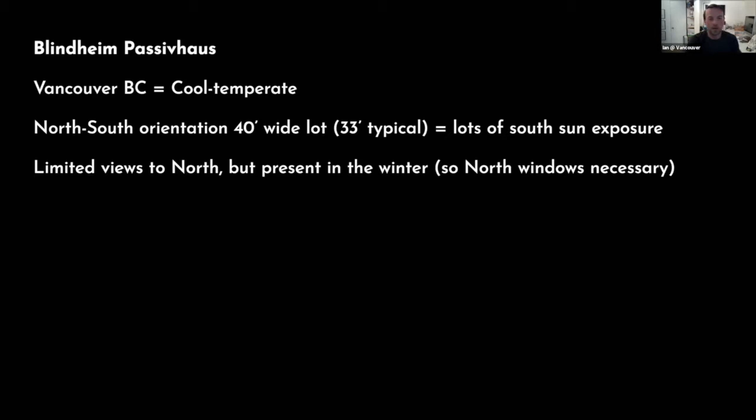The client didn't specifically want a passive house per se, but they did want all the superlatives that a passive house does. So when I added all of these things together, each one has a little bit of an additional cost over what a bog standard thing might be, so why not actually just put them together and do it properly. And then the fact that at that time there was a bit of a bonus for doing a passive house in terms of permitting, that certainly didn't hurt either. This has come down in Vancouver, it's become a little bit more normal, but for a while it was nuts to get a permit in Vancouver. So that was a big motivation.

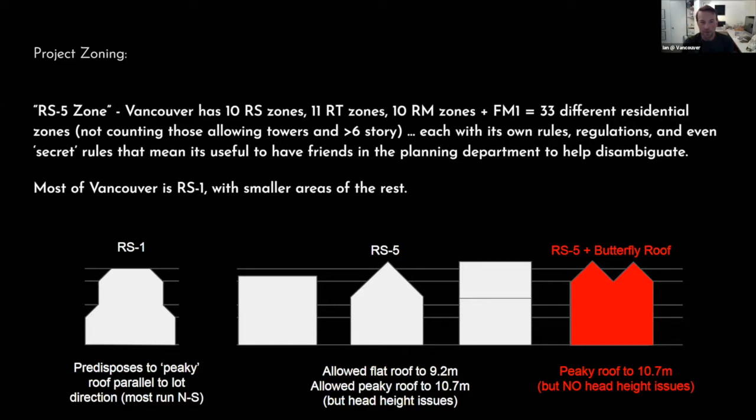The project zoning is in an RS5 zone, which is one of 33 different residential zones in Vancouver. It's impossible to remember them all, so I try not to. But basically, most of them are RS1, you get a peaky roof with some weird steps on the side. RS5, at least you get a big boxy thing if you want it. But if you want to go as high as you could, you have to do a peaky roof of some kind. Peaky roof, though, means less head height on the edges, unless you do a butterfly roof, and then you get the best of all worlds, and that's exactly what I did.

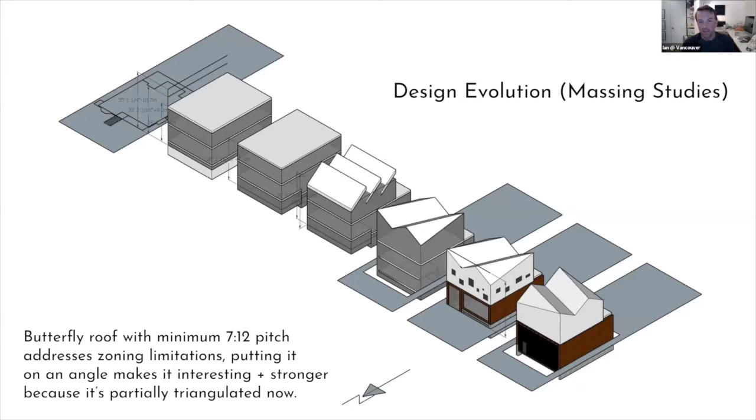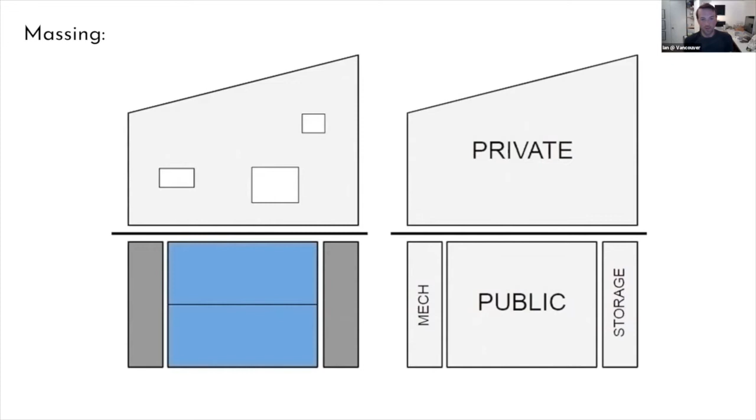Instead of doing just a standard butterfly roof, you can crank it a little bit and make it a bit more interesting. This is the initial design studies, and essentially it hasn't changed at all since the sketch on the bottom right. It just has to have a minimum of 7:12 pitch. Doesn't say that you can't have more than one of them, so toss two of them together and you've got a great roof. The massing diagram is basically a block on top of two chunks with a glass in the middle. Pretty dumb, but in this case dumb is good, simple is good, and that's what Passive House relies on a lot.

So you enter into the basement, because I wanted to have the entire house as much as possible above grade, and functionally above grade, because honestly basements don't really help anybody. But in Vancouver, you're required that about a third of your area is in the basement, to its detriment, but whatever, can't change it, so let's break this rule.

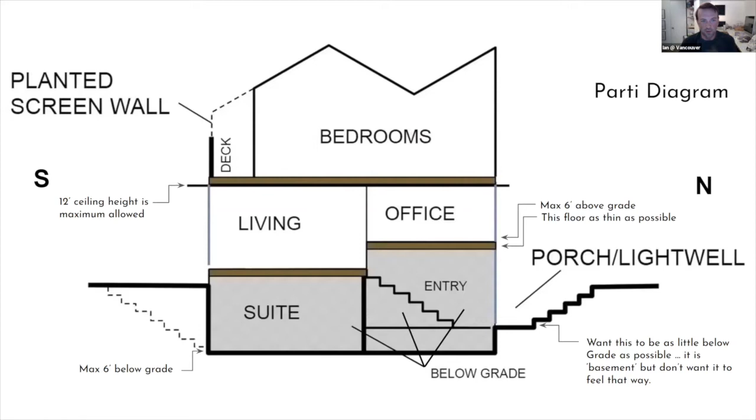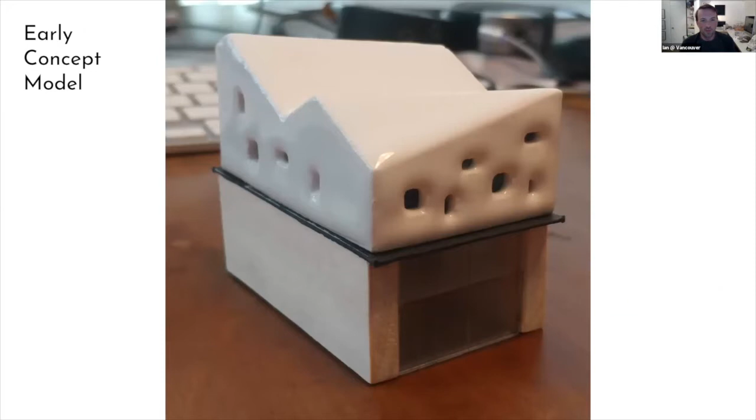Too hard to see this drawing, but from early concept model to render to reality. Pretty legible, pretty simple, follows the same lines.

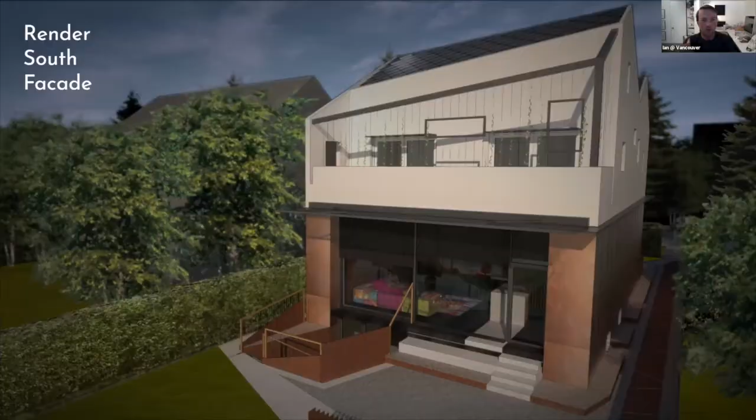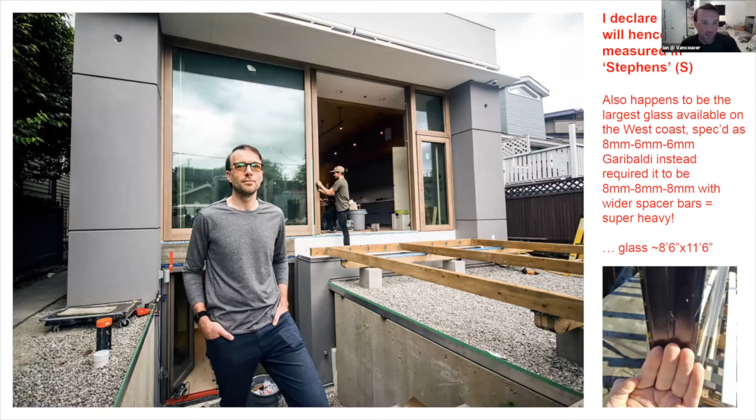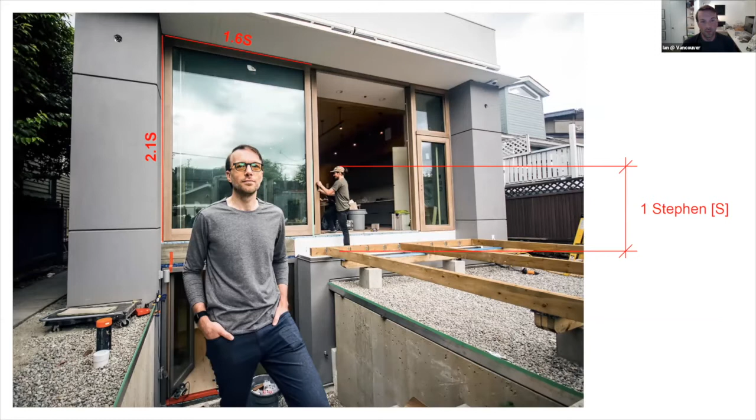On the south facade, similarly, we've got some pretty big glass. Henceforth I'm going to measure my glass in Stephens, because why have small windows? You don't need to have them. This is literally the biggest glass we can get on the West Coast without having to go to funky European glass, which costs more. In this case, we've got 2.1 Stephens by 1.8 Stephens, which I think is a pretty good measure, pretty good sized glass.

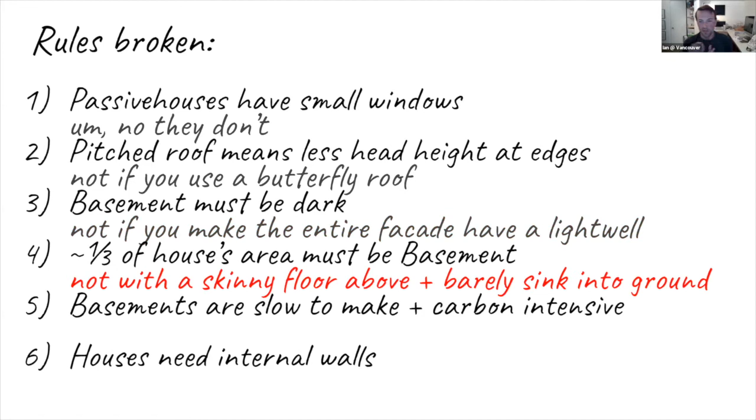So, do they have small windows? No, they don't. You can do a butterfly roof to make best use of area. If you raise up the basement as much as possible, it doesn't have to be dark. And if the floor above the basement is really, really skinny, you don't have to drop it down on the ground very much.

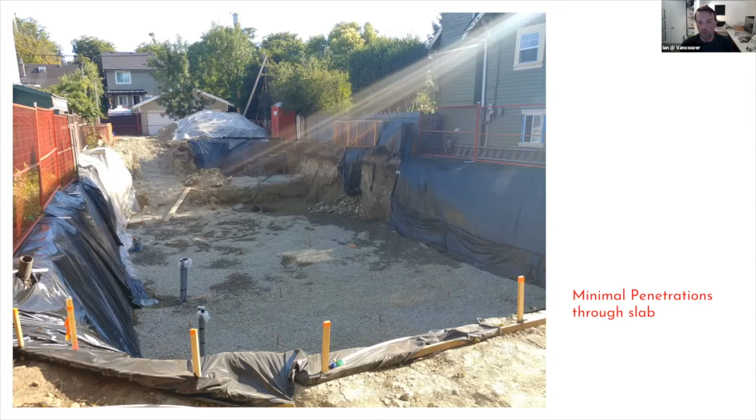So it was very normal to start out with just gravel, minimal penetrations, big whack of foam underneath. It was supposed to be XPS. We changed it to EPS because it was way cheaper for some reason.

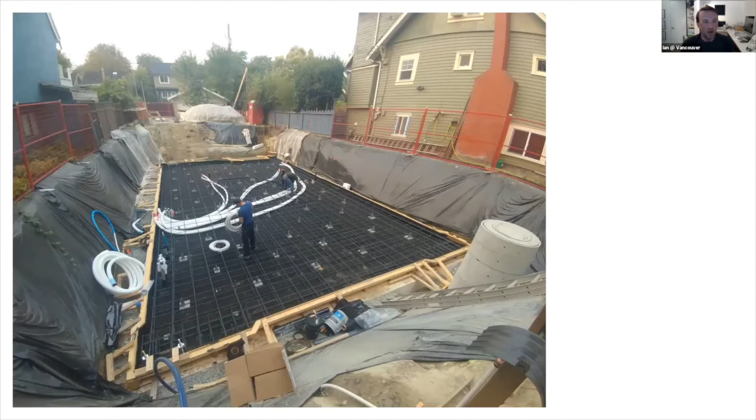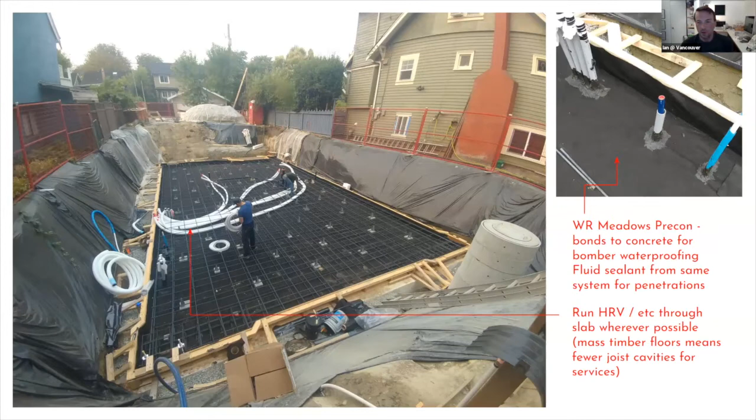Then used a nice commercial grade membrane system, ran all the HRV pipes essentially through the slab. This is about the only concrete in the whole project, once that was poured, although we could have reduced it a bit if we'd coffered the underside.

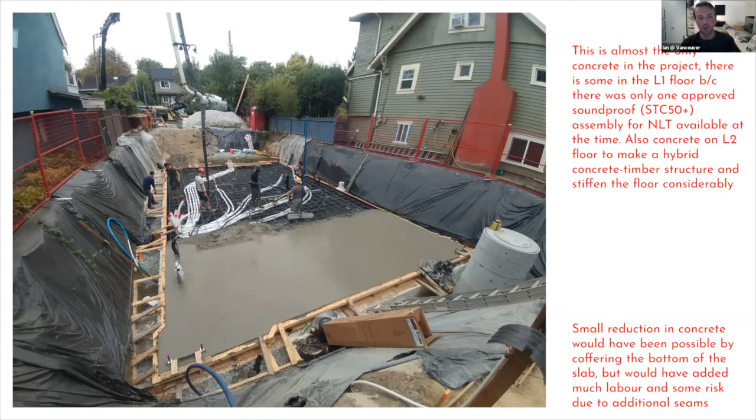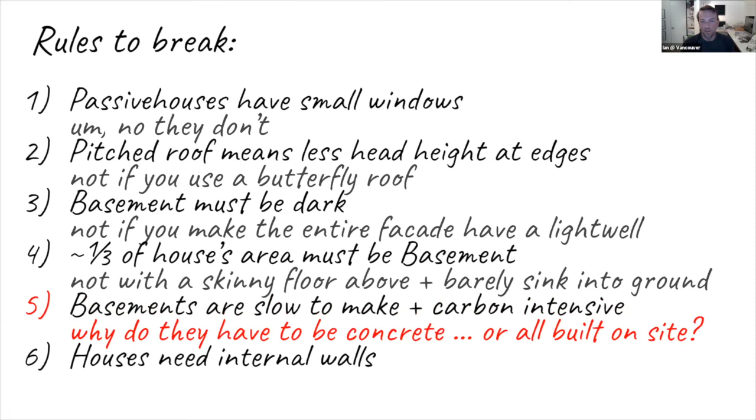So basements are slow to make and they're carbon intensive. Well, why do they have to be concrete and why do you have to build them on site? These exist. These came out of Alberta.

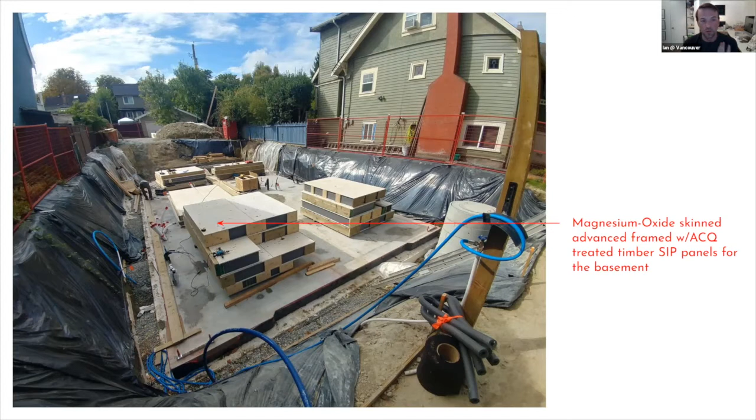So these are a magnesium oxide skinned SIP panel. It's basically an advanced frame wall with treated lumber inside. And you're not relying on a concrete foundation for your waterproofing anyway, honestly. You're relying on your membrane, so use a good membrane with these things. And you get a basement which instead of being R0 is R50 something, with minimal outside insulation needed instead of having to backfill 12, 14 inches of insulation you might otherwise need.

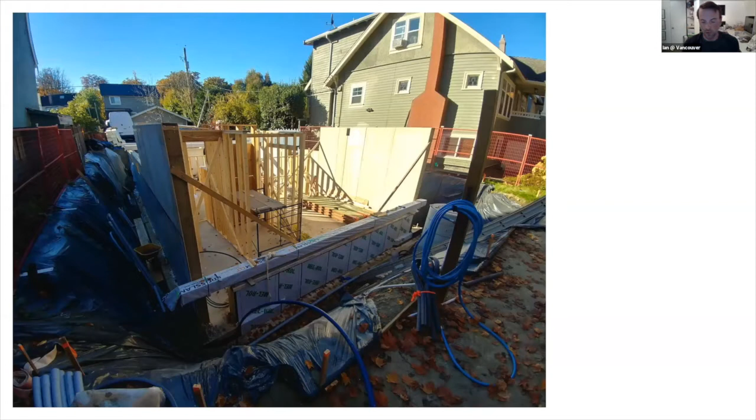So, yeah, we were really careful about the waterproofing system and everything like that. We've got a good commercial system.

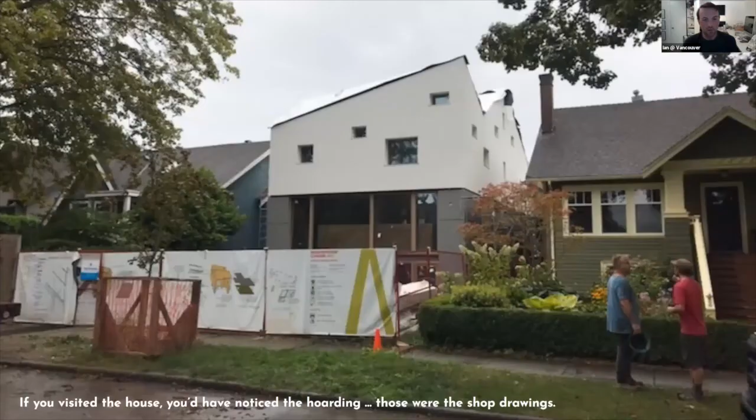The interesting thing is basically everything above the slab is digitally designed and fabricated with shop drawings and everything like that. So if you visited the site, you noticed the hoarding. That hoarding was actually my shop drawings. I figured I might as well just put them on display so people can understand the thing.

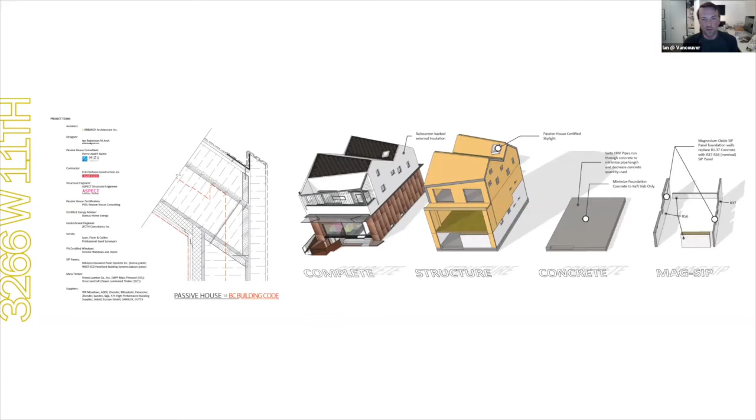So it introduced the project, but it also showed all the main components of the whole house. This is beyond the raft slab and the SIP panel basement. We use Simpson panels to create a moment frame on the cheap. These things are way simpler to use than a big steel frame. Thermally, it's way better as well. Big glulam beams on top, connecting everything together.

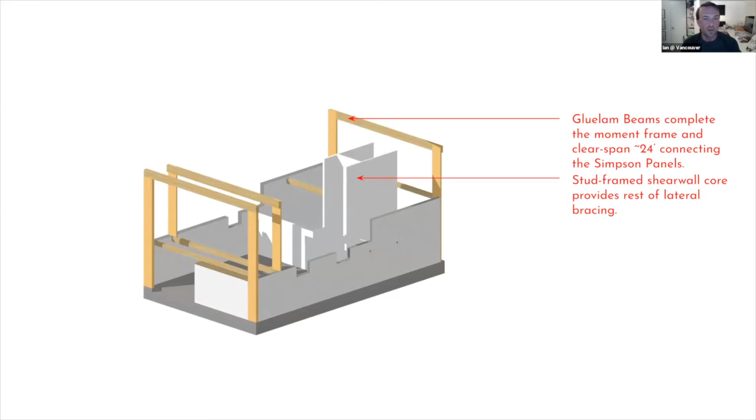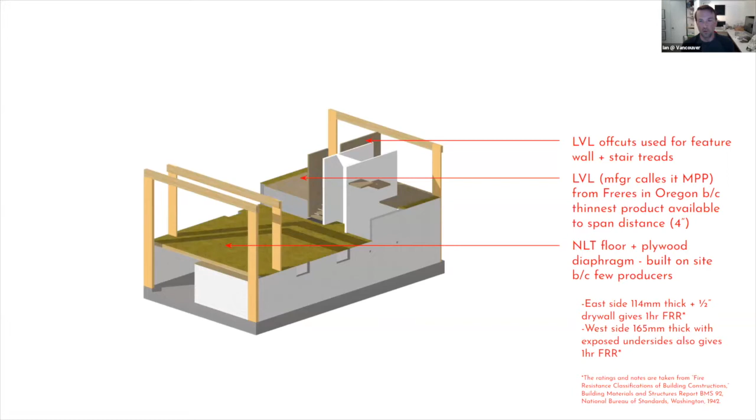NLT floor for the basement suite because it has an intrinsic fire rating. LVL floor, although the manufacturer calls it mass plywood, for the office level to make as thin a floor as we possibly could have, so that floor is only 4 inches thick. That means the basement doesn't have to go very far into the ground. This is the LVL being put in place.

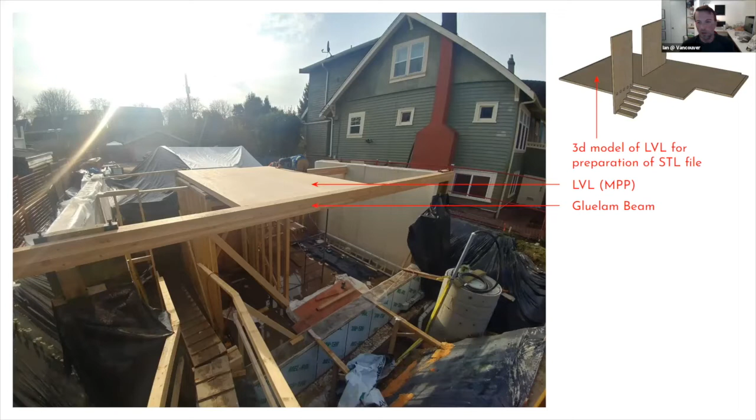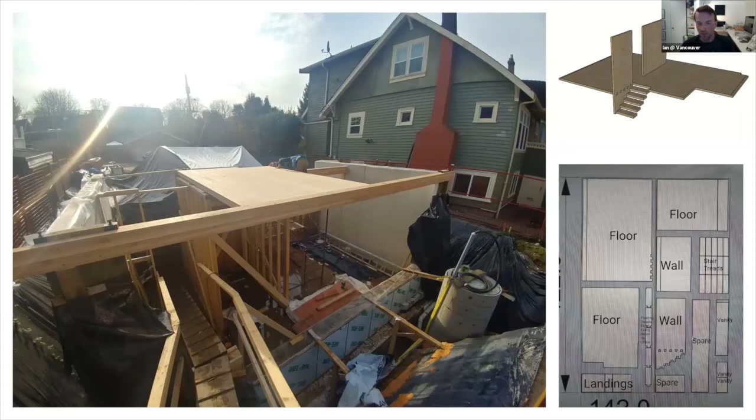And glulam beam just on the edge, also very, very skinny. So then I ended up actually doing the shop drawings for it because the manufacturer was just getting up and running and didn't really have that capability yet. Probably the last time I want to do that, but it's possible. And it's a nice product.

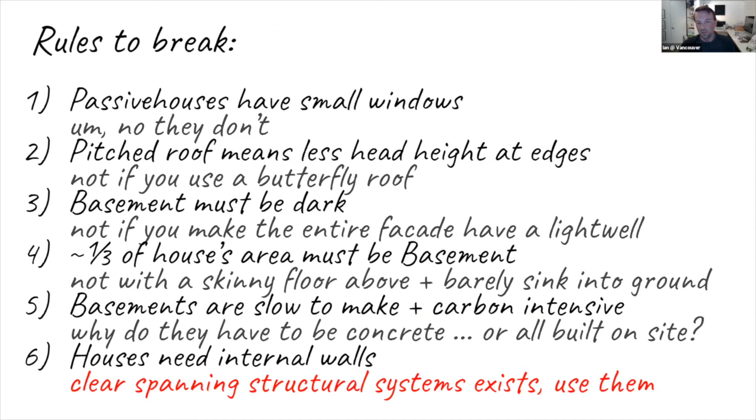So houses need internal walls? No, they don't. Clear spanning structural systems exist, might as well use them.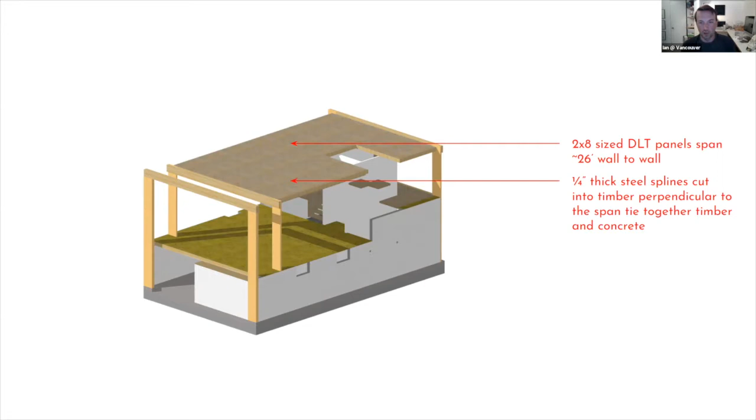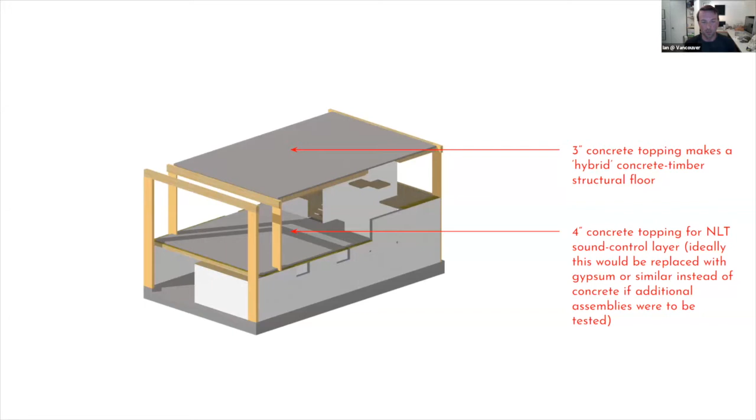In this case, it was DLT, dowel laminated timber, another fairly new product to the Vancouver market with a longer history in Europe. And then that used a little bit of steel perpendicular to the span, with a couple inches more concrete to make it a hybrid structural system to allow 2x8s to span 26 feet. It's a long way to have only 2x8 span. It was a bit wobbly and bouncy before the concrete went on, but as soon as the concrete was there, it was bomber, like it was really impressive.

So this is from StructureCraft, and I counted it, there's actually 6 different flavors of mass timber. On this, the thing that I'm missing was a couple headers or PSLs.

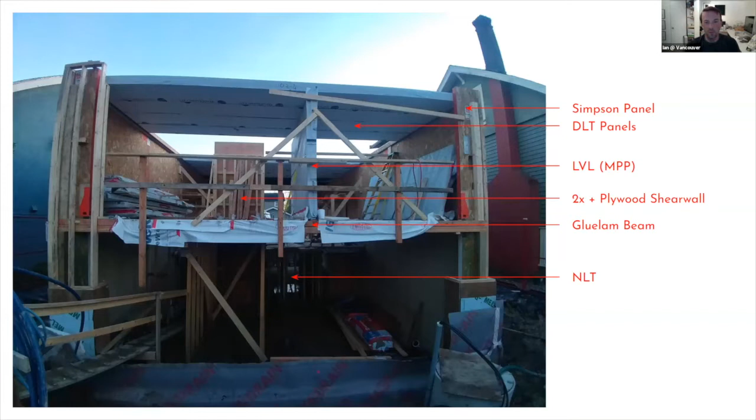But it's interesting because the Simpson panels are essentially just big OSB. And all of these things were used basically for significant structural reasons. It might seem weird to have this many, but each type of mass timber has its things that it's good at. So this house is basically tuned to use the things that it's all good at.

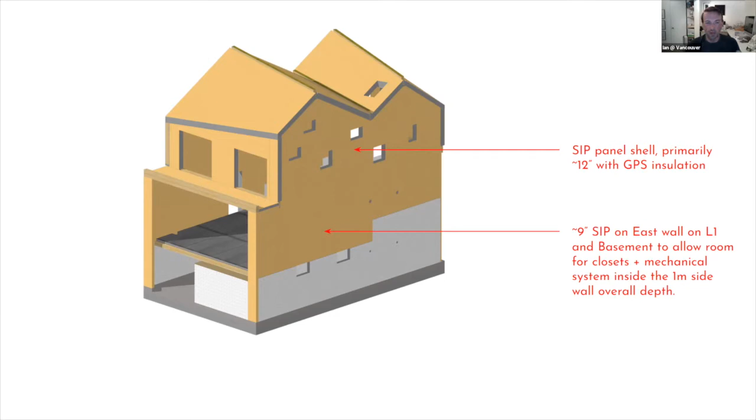Regular SIP panels for the rest of the shell, mostly 12 inches thick, some 9 inches to allow the mechanical chase on the east wall. And then big glulam beams spanning side to side about 24 feet.

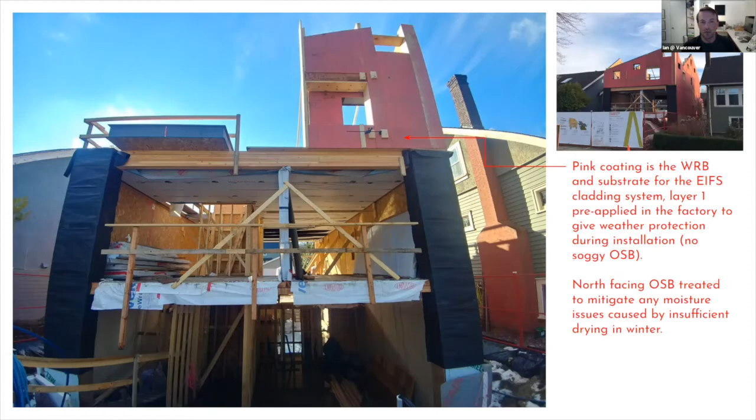The pink coating is actually a fluid-applied WRB, which was the substrate for the EIFS skin that went on later. I thought, well, as long as we've got one layer on anyway—the manufacturer had pre-applied stuff before for use in schools—this gave the house a nice umbrella, because it does rain here in Vancouver. So why not, since these are OSB panels and it's a bit of a risk, let's ameliorate most of that risk by pre-coating them.

This is why I wanted to use the shop drawings that were in 3D and not have to tell the SIP company in 2D how to do it. I didn't want to have to figure out all these angles, and because I just gave them the 3D model, I didn't have to. It's great.

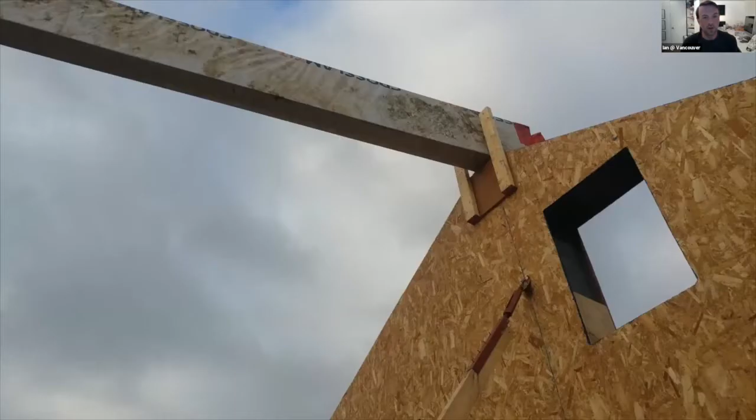So the whole thing then could go together pretty quickly. As soon as the SIP panels went up, they could have their seams all taped, and essentially for a little while it was a cathedral inside. Anyone who did the Passive House social in this space—I really wish I had videotaped a cellist or something, it was pretty cool. Of course, walls came into this space later, so it lost a little bit of that coolness.

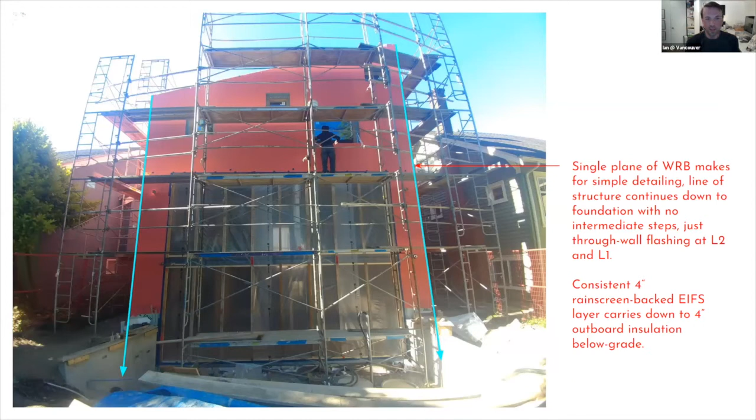But still, it made for a tremendously simple envelope system, because it was just one SIP panel line the entire way down to the basement, with 4 inches of external insulation everywhere. So it became really easy to line up all the different layers, with just a couple of through-wall flashings in between.

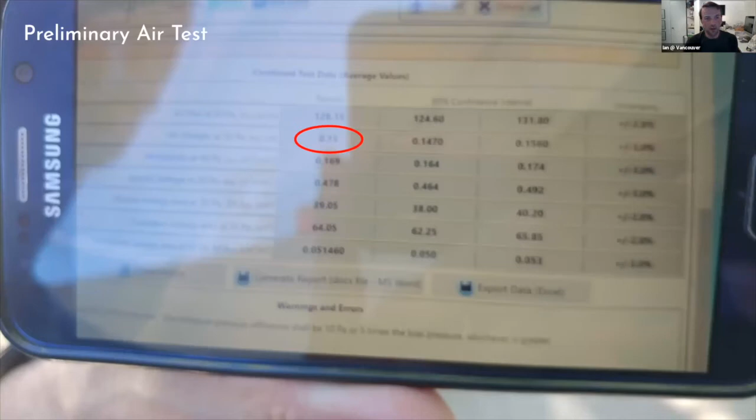This makes it really easy to do a really good air test when you've got fluid-applied WRBs, really good sealing, and really big panels—you've got no place for air to go. So in this case, a preliminary test was actually 0.15, which is not so bad.

Caveat is that it was done before the big windows were put in—I don't have the data for the more recent ones. So this was the shell and the upper windows only, and then poly off for the rest. The poly will perform better, so the house will perform a bit worse, but that's going to be the ballpark.

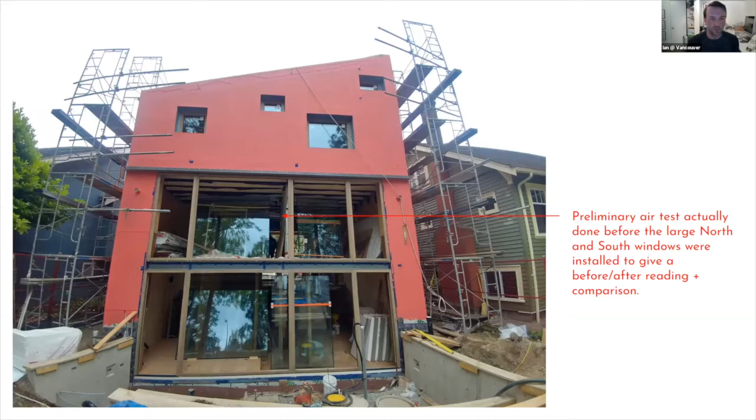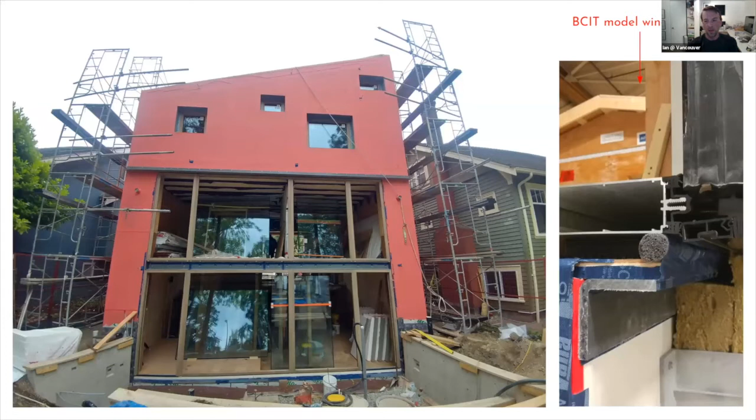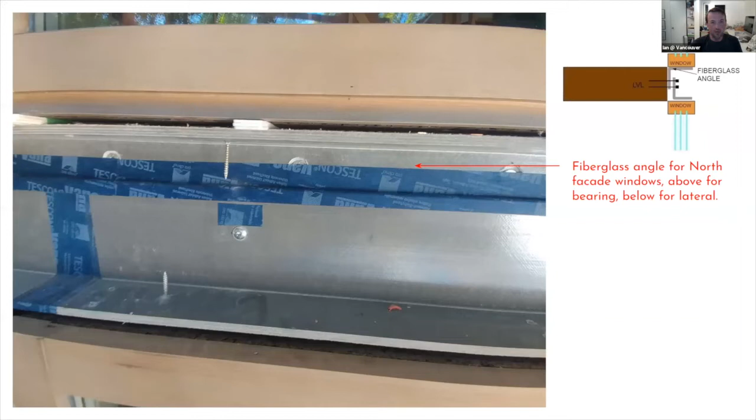I was interested to see this window detail at BCIT. This is a local school that teaches Passive House people in Vancouver, using this interesting fiberglass angle, and that's exactly what we did for ours. So the north windows are sitting on the fiberglass. It's thermally about the same as wood, so it makes it really easy to hang a big window on something that has very little thermal bridge.

To help that out a little bit, we did use a little bit of heating. If it had been a floor covering on this floor, we could have used an in-floor wire. In this case, we'd have the mass timber only, so we had to do something that could be applied on the surface. This was something used more for roofs, for heat tracing gutters, but it works perfectly indoors as well.

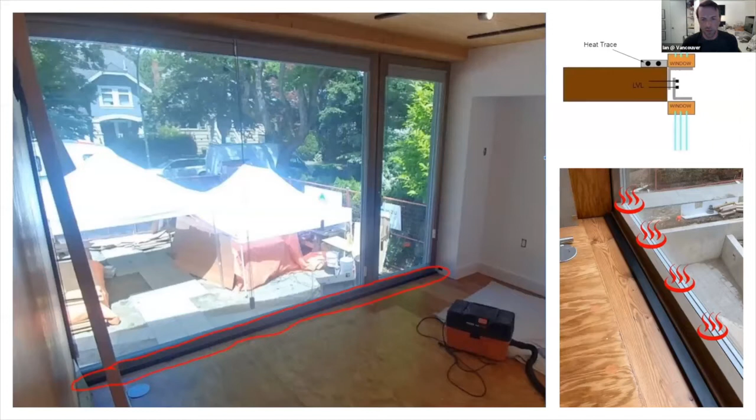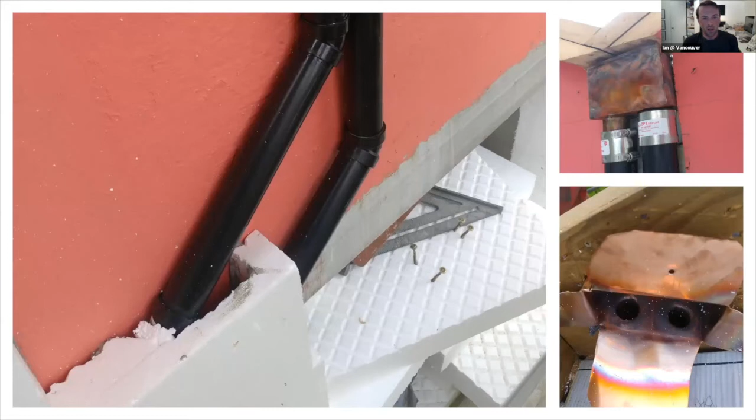So it's an EIFS coating on both levels, tooled to look like concrete on the lower level and just pure white up top. All the gutters are actually running sort of externally, sort of internally—outside of the WRB, inside of the EIFS coating. So if there was ever a leak in here, you don't really have to care too much because it's easy to address if there was. It's basically the least risky way of doing an internal gutter, and it's pretty and architectural, which makes me happy that you can possibly do that.

So we use these copper boxes that were custom made to go through a little custom parapet cap, and the pipes just go through two of them so it can fit within the 4-inch EIFS layer. Then you can see how all the structure just perfectly lines up—you've got a little bit of external insulation with some through-wall flashings, otherwise everything just sticks on top of each other. It's the simplest thing in the world.

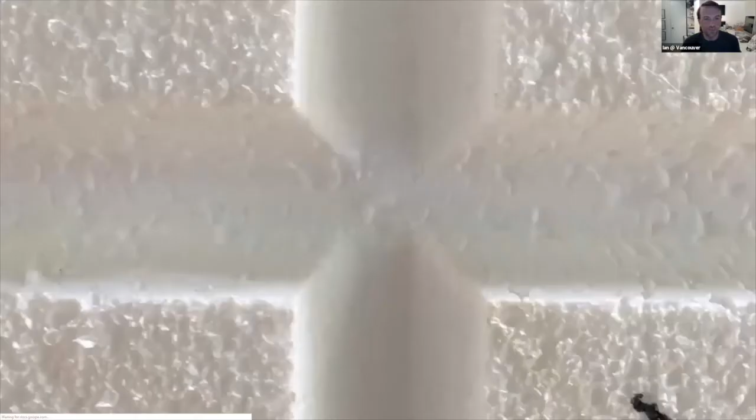There's some actually very nice tooling on the EIFS to make the concrete pattern. I was really impressed with these folks—I'd use them again.

Outside of the house at that point was mostly finished looking. Inside was like this, so the inside lagged the outside.

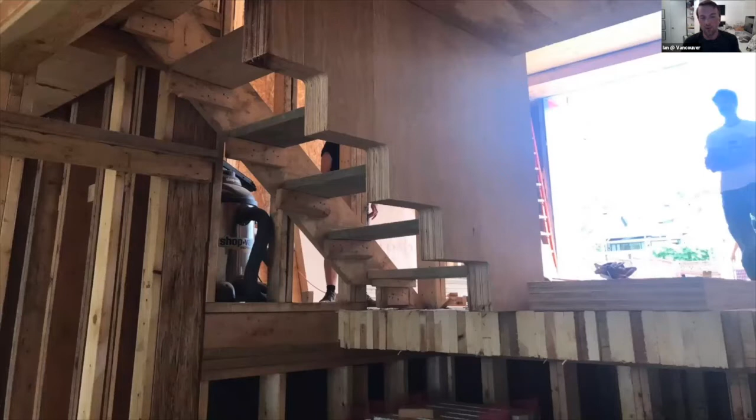Here you can see the DLT, the LVL, and a few of the other things. The LVL we actually used for some of the walls and also the stairs and a bunch of other things, because I thought might as well treat it like furniture as well. You know, use furniture out of plywood, so let's just scale it up about 10 times and make it out of that.

Mass timber means toilets are a bit tricky, so we actually had to do wall-mounted toilets so we could have the pipes run through the wall everywhere. That was the main annoyance, really. Everything else wasn't all that tricky with it.

So there's a cavity everywhere. Initially, this was going to have insulation in it. We were able to eliminate all that insulation because of the really good air test. So about $20,000 of rock wool went out the window, which was useful. This was just for drywall and that's it, and for services, and made it a lot easier to do everything. You can see all the tape joints on the panels outside and inside.

Living room, then we propped up the floor to camber it a little bit, so when we poured the concrete, it then settled flat.

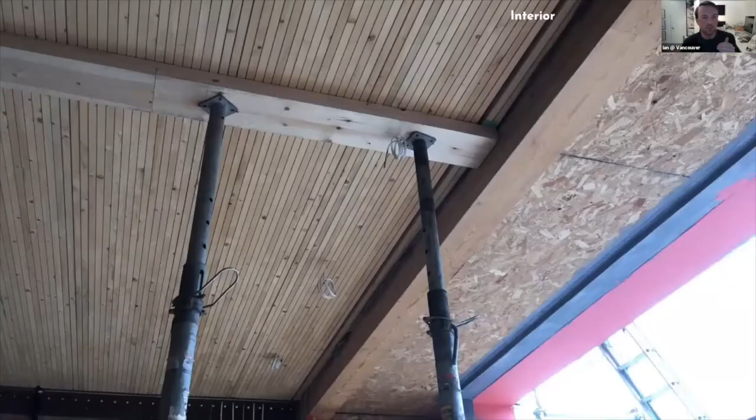Then this became interesting, so the interior and exterior you can see where the roof deck is. Normally the situation would rely either on quite a big step down or quite a big step up to get enough insulation, whereas I did this instead.

So this is using a skinny SIP panel and then vacuum insulation above it. Vacuum insulation in this case, it's just sitting there with gravity, so it's the easiest way you could possibly use it.

This was some overstock stuff from Panasonic, which is actually really cheap. Even at normal cost, it's only about $8 or $10 a square foot. So it's really not that bad compared to its insulated value and how much benefit you can have in this situation. It does require a lot of care when you're putting it in.

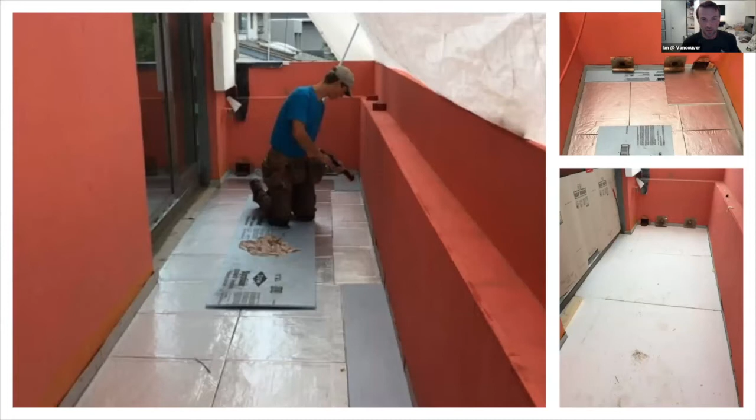So everyone on site, we didn't let the roofers do it. The contractor did it, quickly did it before the roofer was going to do it. Put the insulation, put the board on top to protect it, and then the roofers put the roof on the next day.

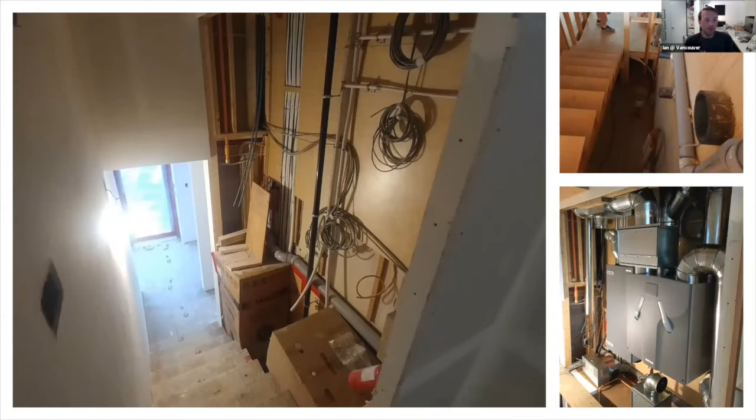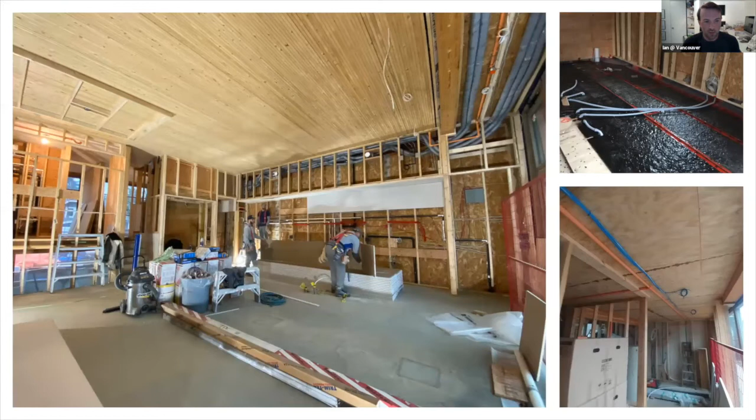Mechanical systems ended up being a little small. I think some swears were said at me. You can see both tanks at the bottom of the shaft there, HRVs were on top. It worked. I planned it out ahead of time to know that it could work. It was just tight. But in a house in Vancouver, real estate's at a premium, so you can't not have tight things, basically.

Here's the living room before we started doing any finishing, any layers, so you can see all the guts.

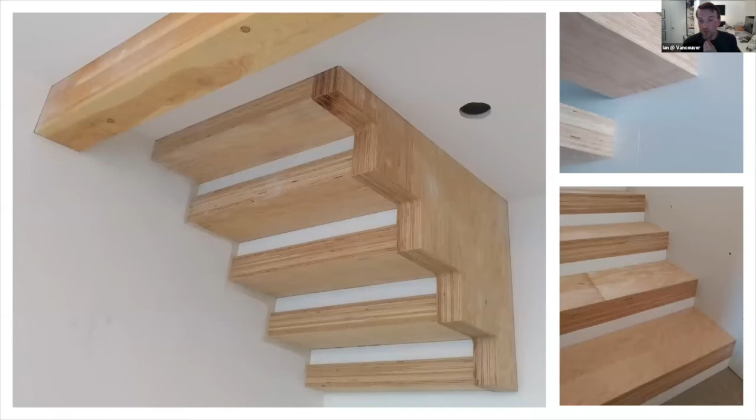Some of the nice mass timber, these were essentially just offcuts from that floor that we got to use then everywhere else. So all the stair treads are chunks of mass timber. Ends up being nice that you can have this stuff featured really nicely.

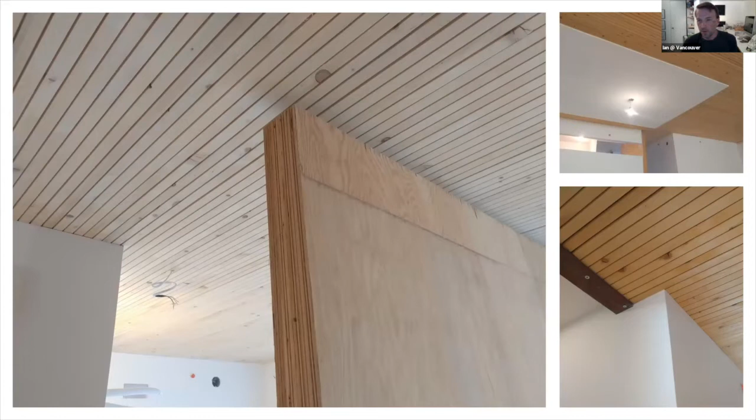So the final living room then, the lights ended up being a little bit heavy. That was the interior designer's decision. But otherwise, it makes a pretty good room. It's 25 feet wide by about 35 feet deep. It's about as big a room as you could possibly make on this lot in this city.

Basement suite has exposed NLT ceiling on half of it. That's using specific fire rules that allow one depth to have one fire rating, and a smaller depth with drywall also to have the same fire rating.

In the office, the ceiling gets a very similar look, but this time out of DLT. It went DLT instead of NLT because we literally couldn't get 2x8s long enough to clear a span without going to Alabama and ordering a train car full.

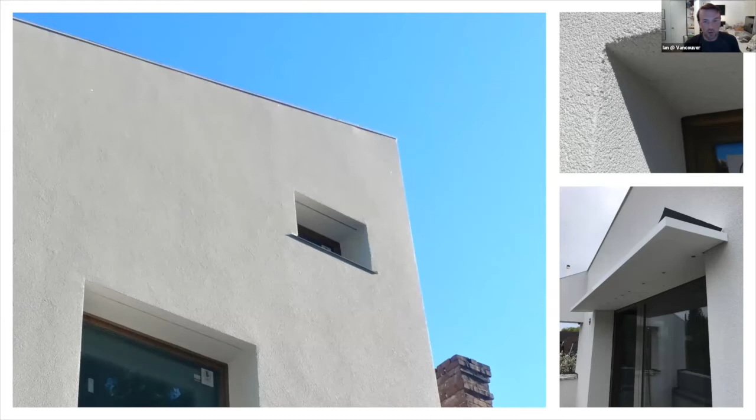The EIFS ended up being tooled really, really nicely. I was impressed with these guys' work, they really embraced really clean architectural details. And of course, because of that parapet and internal gutter detail, I didn't really have to have overhangs while still having good factor of safety with my envelope system.

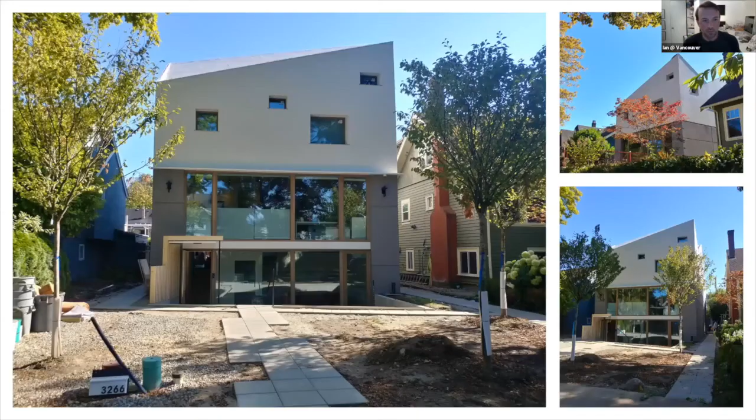And here's the house basically done, this was a couple days ago. You can see the gutter on the roof starts at zero when it's on the ridge and then drops down to about 8 inches deep when it's on the corners, because you don't need a gutter when you don't have any roof slope to feed into it. So it pitches up proportionally with the roof drop.

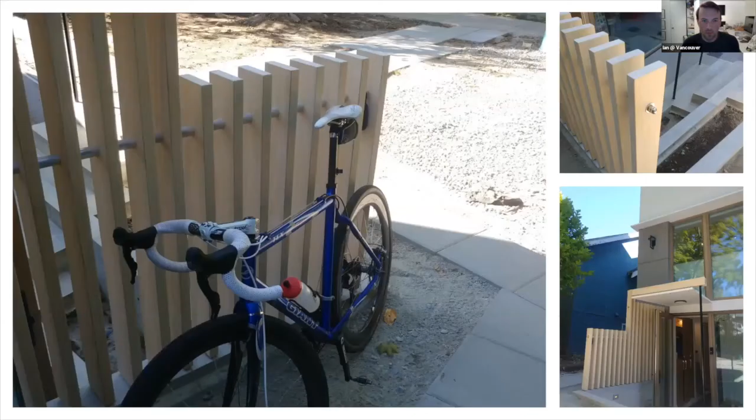I have absolutely no idea where I am for time, but that was it. I think I went through the slides a little faster than I thought.

Wow, if anybody wants to unmute and do a round of applause, I think it's totally appropriate. Wow, absolutely, yay, that was great, really great. You have more different technologies and components and approaches in one relatively compact house than some large buildings do, and I just love the way it serves as a skunkworks for so many of those.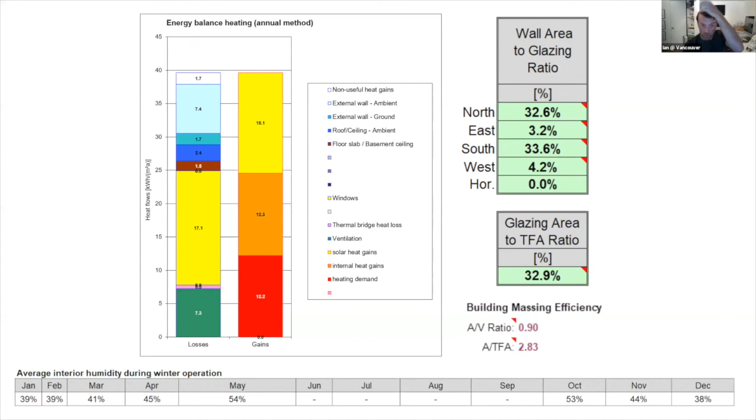It's the north and south ones that were the driving factor for all of it. So that's why we had to overdo our envelope pretty much everywhere a little bit to make up, especially for the north window being quite large.

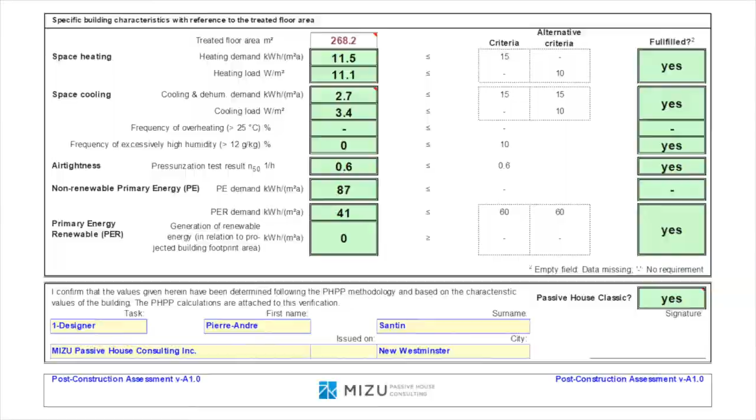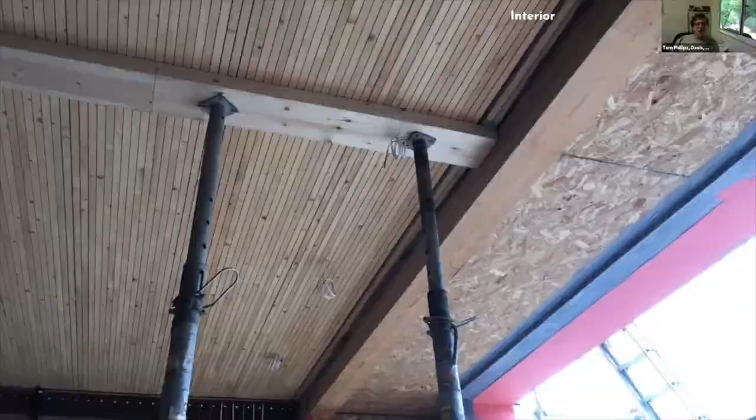It looked like you had a retractable awning in one picture, but I couldn't really tell. Yep, I can go back here. Are those the south windows, the big ones? Those are the north ones.

So you enter basically the office floor, which is the first floor, right at head level. You drop down a couple steps. In Vancouver, you can have a light well and you can have a porch - I don't think they intend that you can combine these things together, but I did. That's why we were allowed one big, huge light well essentially for the entire front facade, because otherwise you wouldn't be able to do this much of a change of grade.

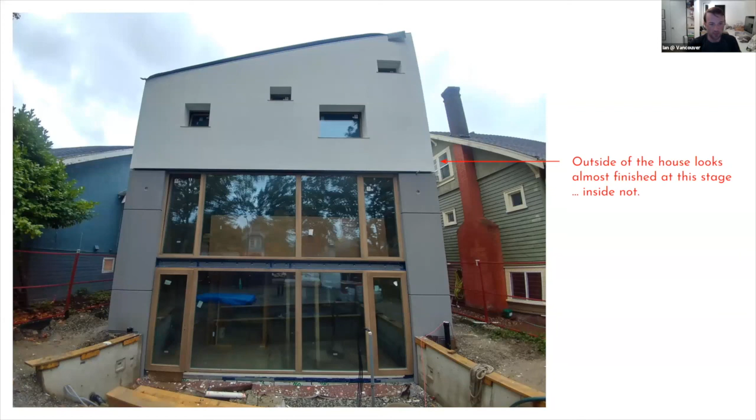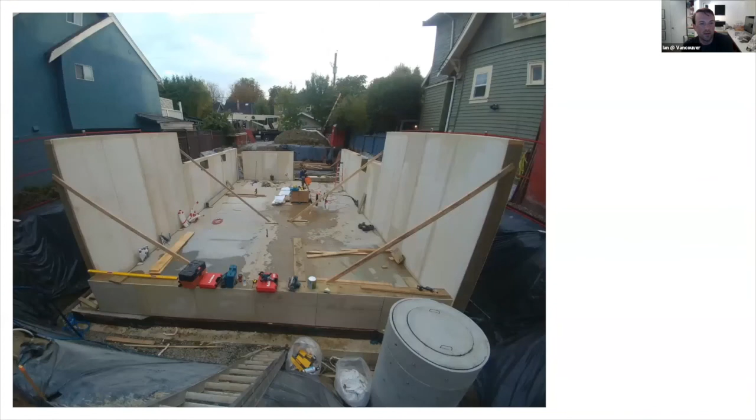Balcony - where was that photo? Sorry if you get... it was early on, yeah. Oh, yeah.

No worries, Ian. It's always good to see these slides again. They were fantastic. Do you have a wind-driven rain problem? Oh, there it is. Nice.

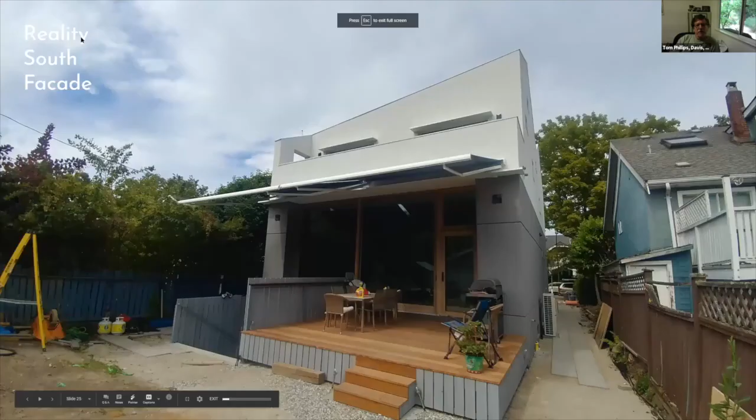Yeah, so those go out 3 meters. We were thinking of doing ones that are a little more even, because this protects the windows. It's still not quite enough to protect the entire deck from sun, but these things get costly as they get too big.

You can see we've got some hats on the windows on the second floor, and there's actually going to be a shading frame up here as well, connecting the peak roof, which will have wires coming down to make like a virtual wall.

Is that a little deck up there on top? Yeah, that's for the kids to have their own roof deck basically. Oh, great. And then the entire parapet wall is also a planter, so you can have stuff growing up it. I'm suggesting hops, but I don't know if that's my advice or not.

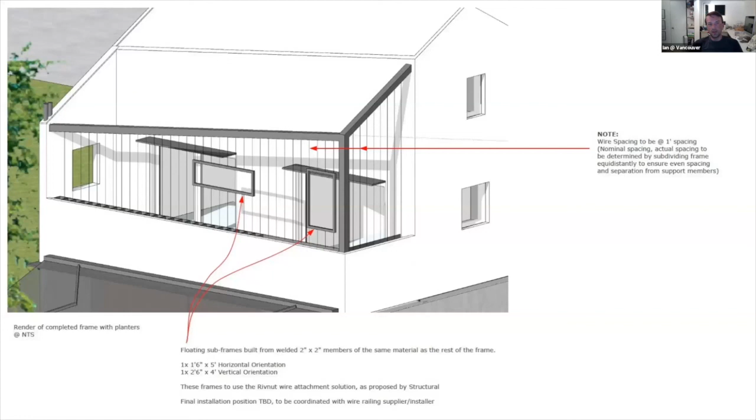In terms of wind-driven rain, yes, it's an issue. But that's why, you have a bit of an overhang, and a good WRB which doesn't mind seeing some moisture. And then big overhangs for all the windows. So yeah, this becomes architecture versus perfect envelope, and in this case the architecture wins a little bit, but I think I've put enough fail-safes in that it's pretty well protected.

Yeah, Ian, you're very creative in making sure this works. And for those that didn't quite understand where the roof has the panels, it's at this juncture. So just in case anyone was confused about that detail.

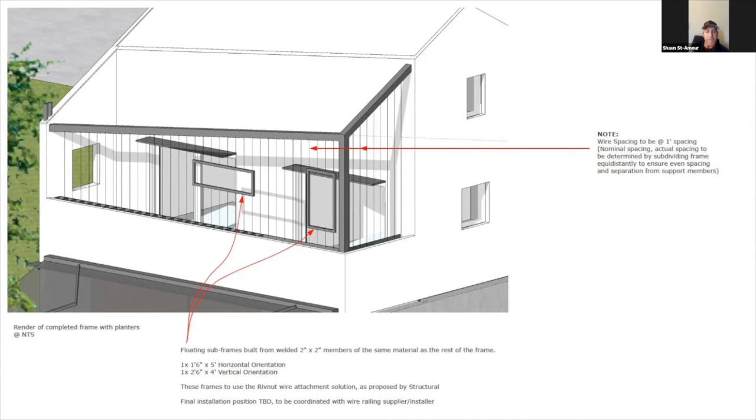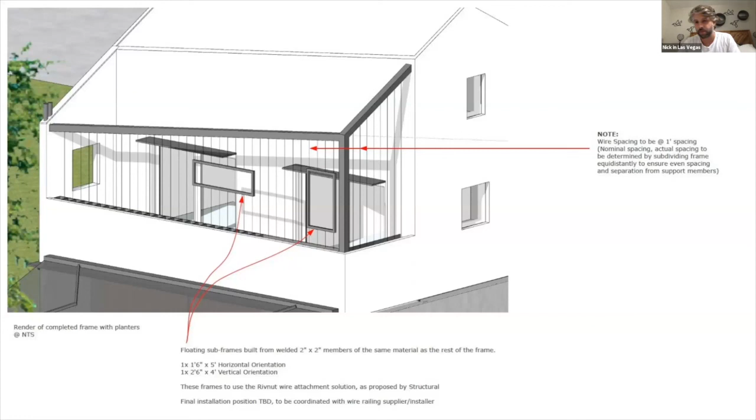You mentioned early on when talking about the basement, minimizing the use of concrete and doing a thin layer on the other floors, and using a lot of wood products. I was wondering if that was aimed at reducing embodied carbon in the building, and whether you guys did an analysis at the end of everything based on the carbon footprint for the building overall.

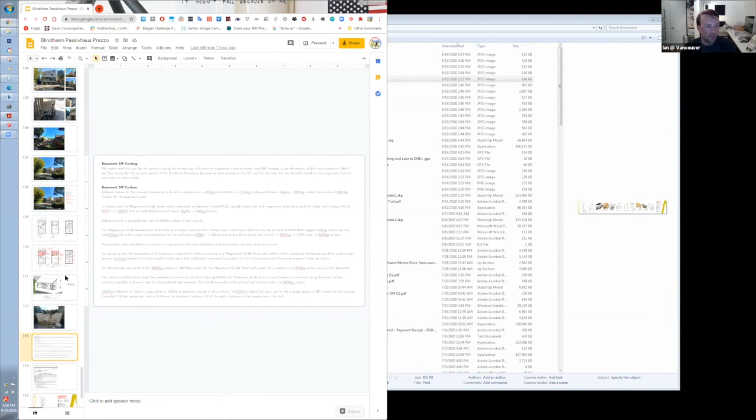A bit. So yeah, I've done a bit on the design side. This was my kind of very napkin math calculation, just using something from the Canadian Wood Council for generically how much wood there was in the project, how much that sequesters, blah blah blah. In very ballpark terms, basically the wood in the project balances out all the concrete.

That's much worse math than I think it really deserves. I did a bit more on the savings on these basement SIPs versus concrete, math more for a slightly generic house than this one specifically. But if you swapped out a normal house's worth of concrete for these things, you'd have 6,800 kilograms of carbon for a regular basement and 2,000 for this one. So it's a 4,800 kilogram reduction, which is enough to drive a Prius 45,000 kilometers equivalent. So it's not too bad.

And yeah, the client didn't really have a carbon reduction thing in mind, I do. So the basement SIPs also ended up not really being that much different in cost than if you add up all the labor and everything else for a concrete basement, and also the delay that it causes. Oh, interesting. It was only a couple grand delta, so it was like, let's try these out, these are interesting.

Cool. So I'm actually going to use them on a project in Cranbrook as well, because it's a short building season. We want to get the whole house, it's a big house, done within one season. Or at least closed in and not have issues. So instead of spending a month of your year just getting your basement done, let's do it in 3 days. Yeah, that's awesome, great project.